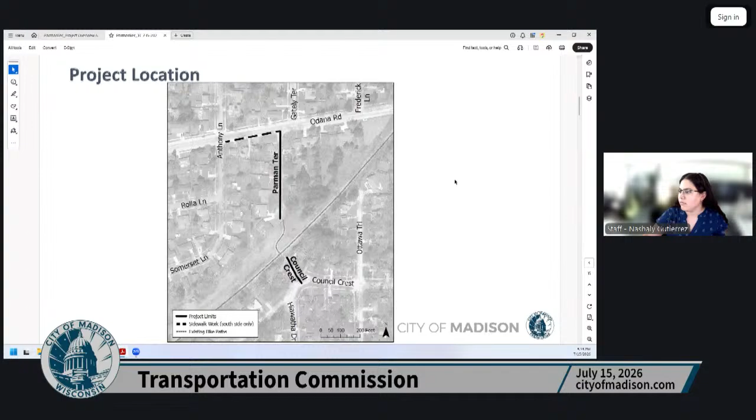For meeting purposes, the project has already done a field visit with forestry and the city design team, and a public involvement meeting last week. I'm here to inform the Commission regarding this upcoming project, the street layout alternatives, and to gain feedback for approval from the Commission on preferred design alternatives.

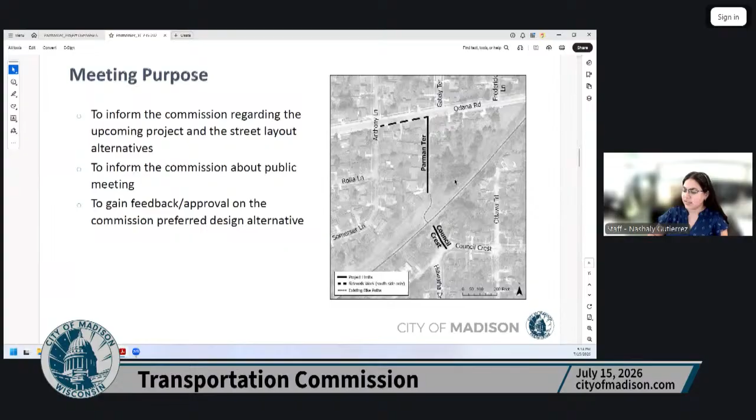Continuing with Complete Green Street, Parman Terrace as it exists right now is classified as a neighborhood street. This is for wider neighborhoods with higher traffic and transit routes, and allows both vehicles to pass each other without stopping. Parman has an existing street width of 28 feet from face of curb to face of curb, with parking on both sides that can typically allow traffic to pass both ways slowly.

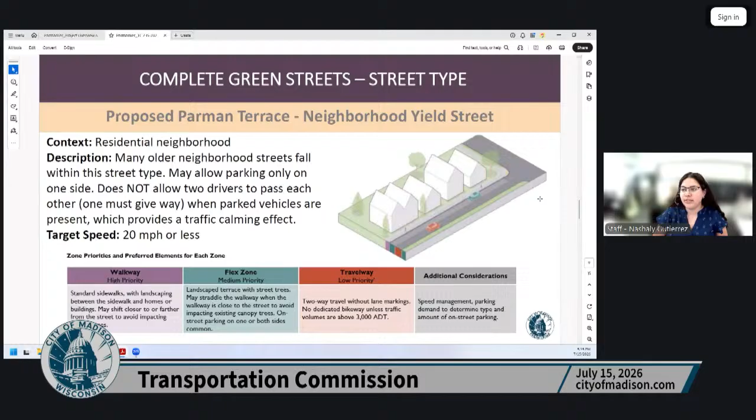With this project, we're proposing to change the street type to a neighborhood yield street. This is for older neighborhoods that fall in this street type, and they allow parking only on one side of the street, and both vehicles cannot pass each other. One must always give way when parked vehicles are present, providing a traffic calming effect.

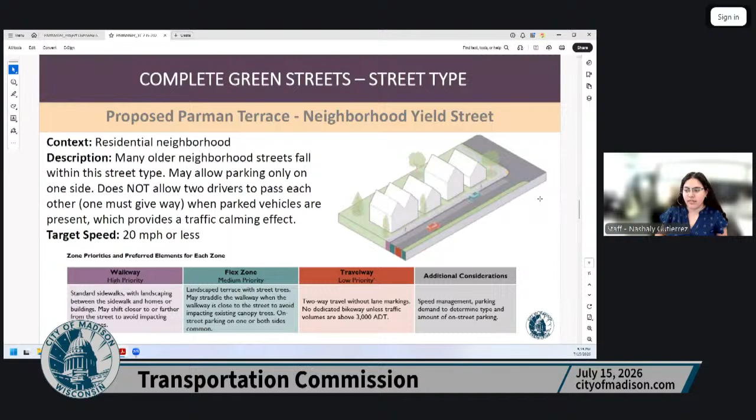As mentioned, we're changing the street type from a neighborhood street to a neighborhood yield street. By the Complete Green Streets table, the requirements are going to be a minimum travel way of 14 feet, to the edge of pavement on both sides. We're maintaining narrow street width if no parking is going to be provided. A typical and maximum travel way width is going to be 16 feet to the edge of pavement, allowing parking on one side. If parking is allowed, two vehicles cannot pass in both directions without one giving way.

With flex zones for a neighborhood yield street, it's from 10 feet to 17 feet. This may include curb and gutter, terrace, trees, sidewalk, and street parking if present. In some constrained cases, a terrace can be as low as 3 feet if necessary.

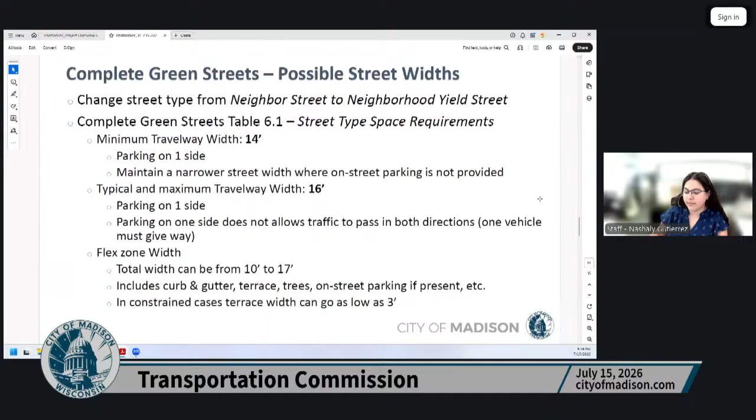With the proposed street design alternatives that were considered, Design A is for a street width of 17 feet from face of curb to face of curb, with a 3-foot terrace and a 5-foot sidewalk on the east side, in front of the trees. We're going to be replacing driveway aprons, maintaining trees in the right-of-way, and having a narrow street for traffic calming. This sidewalk for this design is going to be maintained by residents, and the existing parking on both sides will be removed, giving a travel way of 13 feet for the street. This typical section is going to be seen from the cul-de-sac to Odana Road. The street right now has a right-of-way of 49.5 feet.

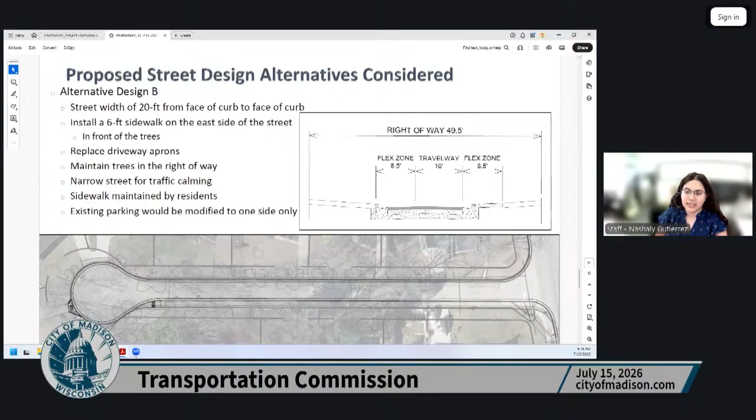Continuing with Design B, this is for a street width of 20 feet from face of curb to face of curb, with a 6-foot sidewalk installed on the east side of the street in front of the trees. We're going to be replacing driveway aprons with this design, maintaining trees in the right-of-way, and giving strict traffic calming with a narrow street. For this design also, the sidewalk is going to be maintained by residents, and the existing parking will be modified to only one side, given a flex zone as shown on the typical section of 8.5 feet - this will be 6 feet for street parking and 2.5 for the curb. A travel way of 10 feet, meaning both vehicles cannot pass each other without one giving way. The other flex zone of 8.5 feet will be for the curb and gutter and the sidewalk that's going to be placed.

Design C is a street width of 20 feet from face of curb to the flow line, having a 5-foot sidewalk at street level on the east side in front of the trees, replacing driveway aprons, and maintaining the trees in the right-of-way.

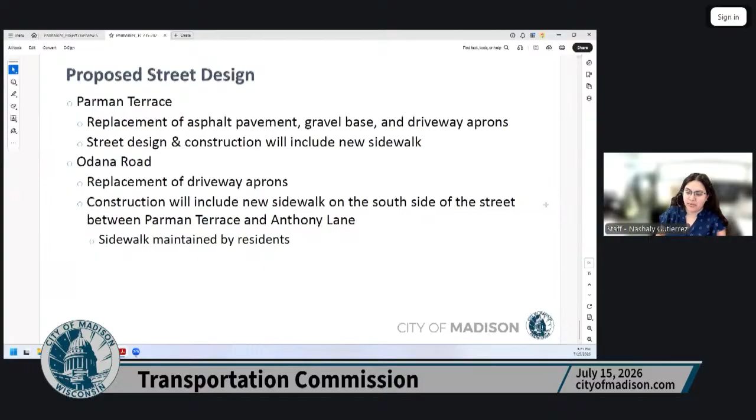For Odana, we're going to be replacing the driveway aprons, and the construction will have a new sidewalk on the south side from Parman Terrace to Anthony Lane. This section of sidewalk is going to be maintained by residents. Something I forgot to mention is that Design C is going to be our city staff recommendation for tonight.

Oh, sorry, I think you're mute. And I am, thank you. Yes, I try and mute just in case.

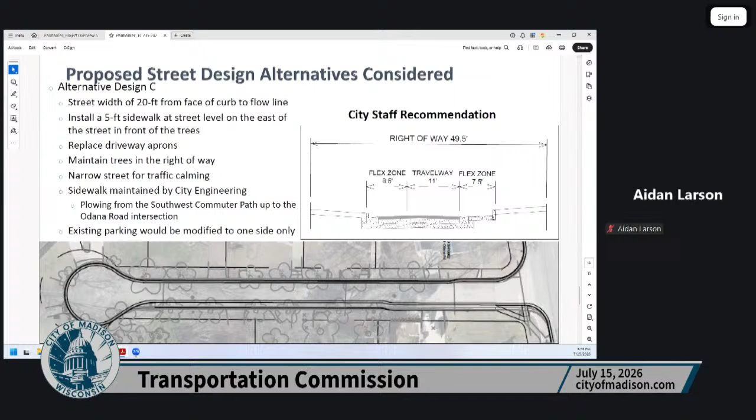As Nicholas said, this street is just wider than anything that we have established as good design practice. All engineering and safety studies from the modern era say we should not be building streets like this.

Option A just seems like objectively the best option. The street is never parked up, and there's plenty of room in people's driveways. I don't understand what we're doing here if we choose option C. It just seems like we're rubber stamping the same old design we've seen for decades that we know kills people. So it's disappointing if we pick C. I'll continue to call in, but people shouldn't have to call in to say this isn't what we want because it's killing people.

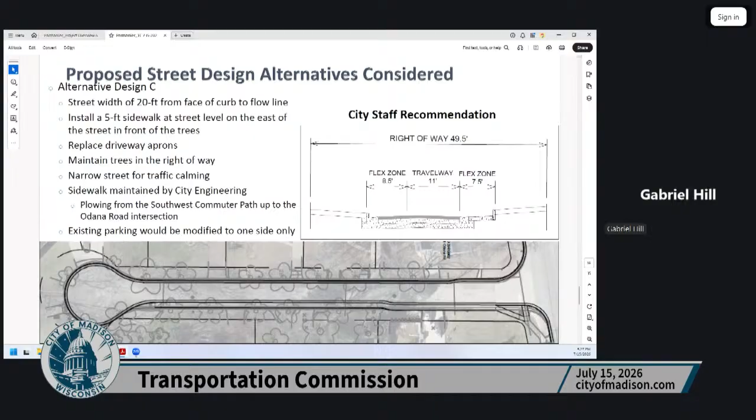Thank you, and I can't take questions. I might have marked that I can, but I can't because I'm at work. Okay, have a good one. Thanks, we appreciate you coming and sharing your thoughts. Thanks so much.

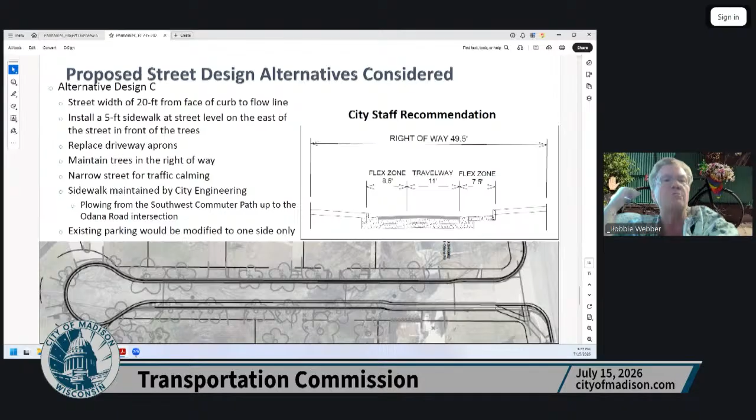Sure, I can give it here. Flow line will be where the water is passing on the curb. If it's a typical curb, it'll be the face of curb. But because this is going to be an alley curb, it's a roll curb, so we don't have a full curb head. It'll be the center of the curb where all the water is pulling.

So is that between the travel way and the sidewalk, or is it between the sidewalk and somebody's yard? The flow line is between the sidewalk and the edge of pavement. So it'll be an alley curb with the concrete sidewalk between that curb and the people's houses on the east side.

So it's the travel way for cars and parking that is 20 feet, is that correct? Correct. Okay, so that was my first question, just to clarify so that I understand. And then you said it's a rolled curb and then a sidewalk? It's an alley.

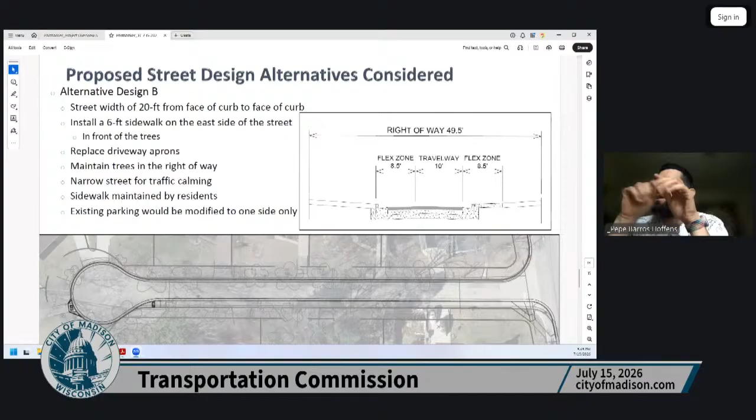Thanks for the presentation, I appreciate the room for discussion and asking questions. I'm wondering—we're closing one sidewalk gap on Odana with this project. Is there any other project in the future, or what's the projection for closing the next gap on Odana?

To the west? Yes. Or the east? To the east—I believe that's what Harold just mentioned. As of right now, we decided not to put that in because it's more complicated. There's tree removals there, and Kevin thought that piece was less critical than the piece to the west. So as of right now, there's no plan, or I'm not aware of a plan for that next piece.

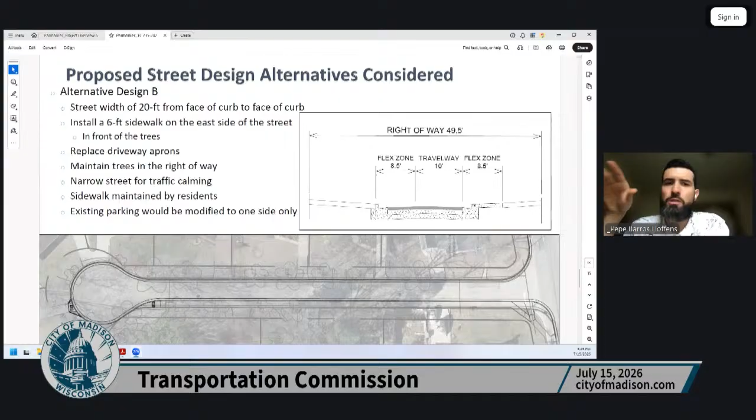Okay, and this might be trivial—I'm asking from ignorance here. What's the logic with the curb going further into Odana on that east side? What does that gap look like, and how does it connect with what's in place right now?

It's matching—actually, it's matching. Is it matching what was just built? We just put a crossing in at Parman and Odana, so we're matching that. Is that accurate, Nashaly? Yes, it will only be the curb ramp connecting to the new Odana sidewalk that has the change, because of the narrow street, but yes, we're matching that connection.

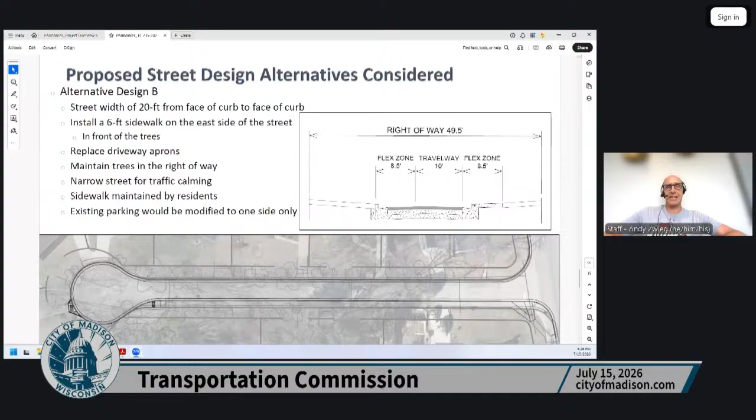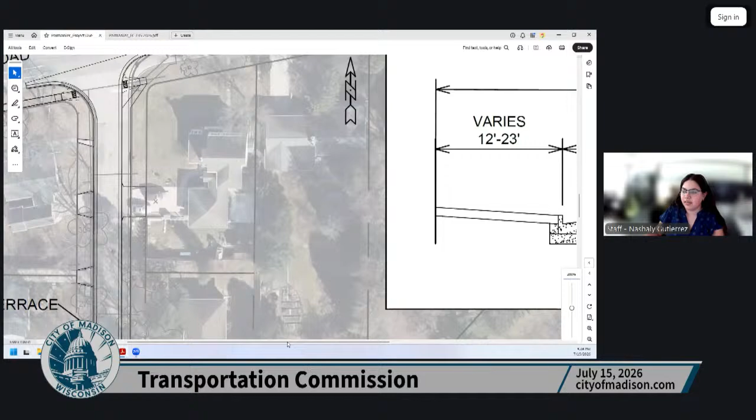So I think the aerial in this photo is off—we've done a project at the intersection since then, and that's what we're matching. Okay, so on that east side, yes, it can be seen a little bit closer on the exhibit. Yeah, because also option A is different than options B and C in how that ends.

So I guess I was looking at option A on my screen and didn't see that connection. Yes, but at the moment the only one will be the ramp connecting to Odana, which might extend a little bit with the curb ramp. I see now—yes, on that photo, on the east side it does come back, kind of like a curb extension into Odana, and then it swerves back.

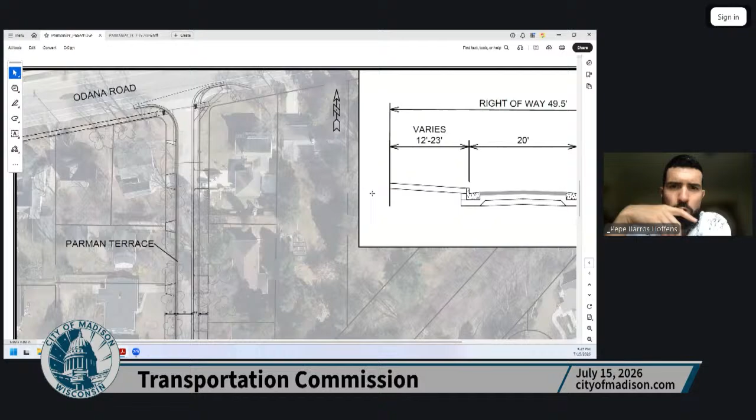Is that going to—it looks like it's blocking the current bike lane. Yeah, look in Google, I'm pretty sure it's in Google right now. Yes, the aerial isn't up to date with the changes done there. Yeah, I was trying to look at it on Google too, to make sense of that—why the curb is so much longer on the east side of the intersection, and if that's going to be built on top of the bike lane. It appears it blocks the—

We didn't have a bump out there, so we utilized the parking—you weren't going to park there anyway because it was close to the intersection—and then stopped the curb short of the bike lane, so it does not appear to impede the bike lane.

I can't get quite a good angle on it in Google, but okay. I think we're using a piece of the gutter from that Odana bump out that was built, as part of the bike lane—it appears to be that. It might be 3 and 2 for 5, that's maybe where we're at.

Okay, so it is going to be a bit of a bump out, but not blocking the bike lane, just taking over what is parking right now, or just curb, probably. Yeah, and that's there anyway—that's there right now. It was already built in 2025.

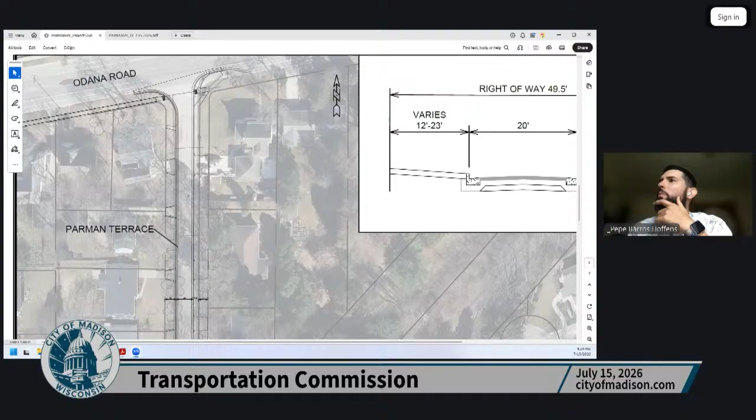Oh yeah, I didn't see it on Google, but maybe I'm just not familiar with that intersection. In Google it shows it, almost finished with construction—like all the barrels are out there. Okay, I'll go back and look there then. I have my Google person kind of in the Parman Terrace part of the intersection, I guess.

Okay. And then, yeah, I guess I have comments. Harold was also saving his comments, but Robbie already shared a little bit.

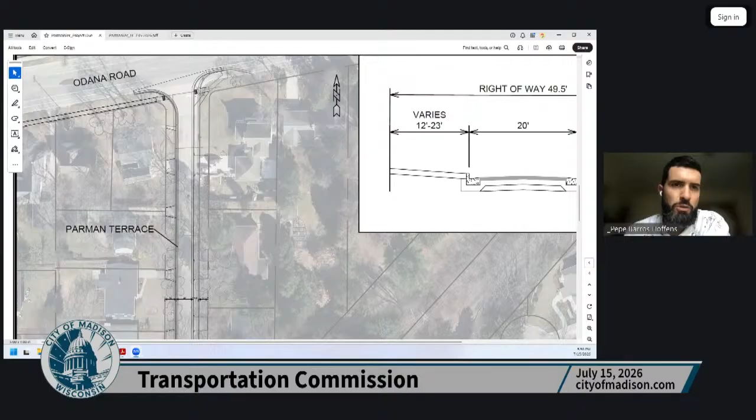I generally just agree with what Robbie said. If we're thinking of putting a sidewalk, why not just putting a standard sidewalk in the regular way we're thinking? A street level sidewalk, you can put all the signs in the world, but it kind of encourages driving over it, parking over it, or having other behaviors there. I'm going to save some of the other comments for later, but let Bill ask questions if he's got some.

Thanks, Pepe. Bill, go ahead. Thank you, Ann.

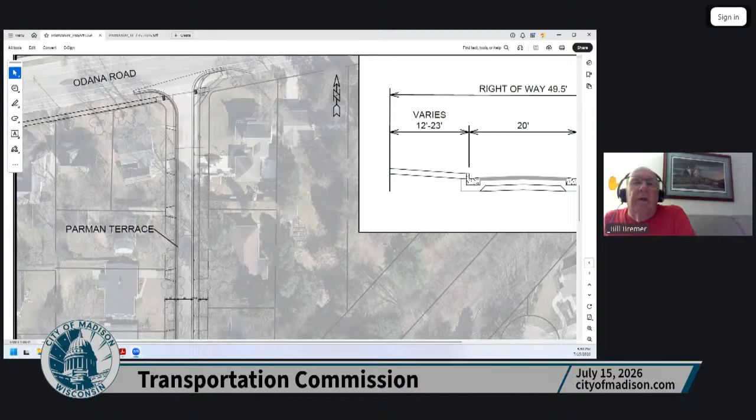What were the neighbors' discussions about when showing the proposed project, and what are they concerned about? Shoveling a sidewalk, or what are their preferences, or what are their thoughts? Was there a concern about losing parking if they didn't have parking?

We didn't go down that route. I mean, it always is a concern, so we were trying to avoid really stirring this project up to be controversial. So by maintaining at least one side and having some kind of pedestrian way on one side, that's what staff kind of threw out as a preference for option A. We in the past have thrown out no parking, and it doesn't go well, so we were just trying to avoid some of that controversy by keeping at least one side parking.

Yeah, all right, those are my questions. I'll wait for the discussion. Thanks. Thanks, Bill. Harold, go ahead.

Yeah, two more questions that occurred to me. First, regarding the snow removal operation - so I think you said the idea is that the equipment that clears the Southwest Path just takes a pass, assuming we go for option C, they would just go up to Odana, turn around and whatever. And then the street would still be plowed by separate plows?

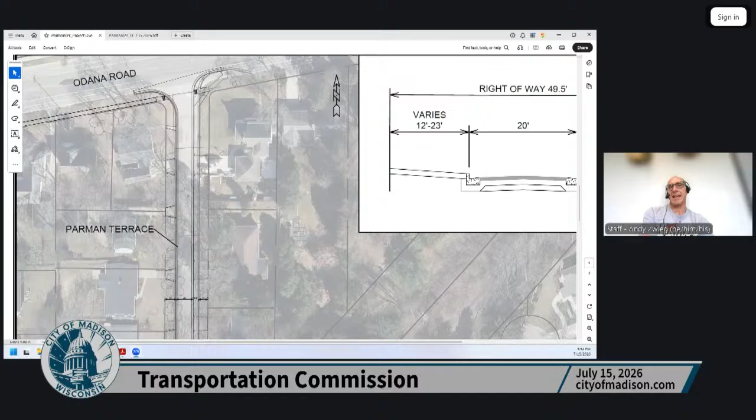And in those situations, it didn't work. So we've been talking about this as staff for a little bit, because it's kind of unique here. But where do we have this, Nashaly?

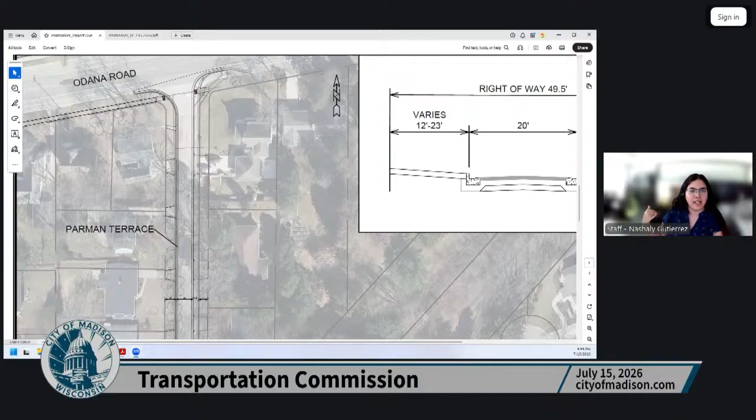A similar can be Cordes Court, close to the Youth Symphony Orchestra building. On the back, that little alley street has the alley curb and a small sidewalk on both sides. For the benefit of the commission, do you mind? Can you maybe pull it up in Street View?

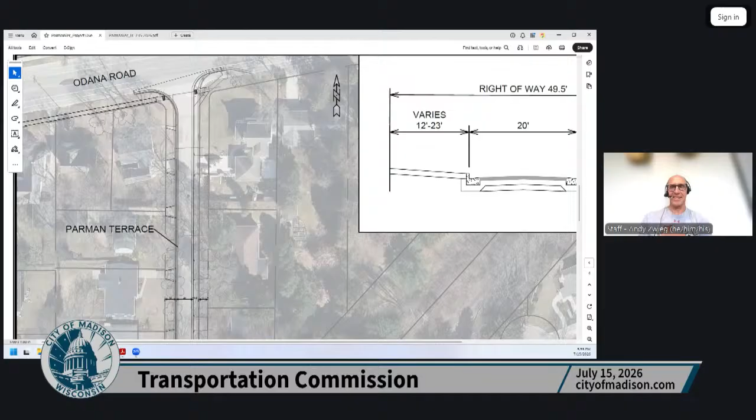Here it can be, this is the Symphony Orchestra building, and you can see the alley curb on both sides and a smaller sidewalk. This looks like it's probably been in place for a long time. This does not look new. I don't think we have any new versions or a new situation like this. And that's unique, and we know that. Just seeing if the commission thinks that this might be something to work on, this specific situation with a path and a cul-de-sac.

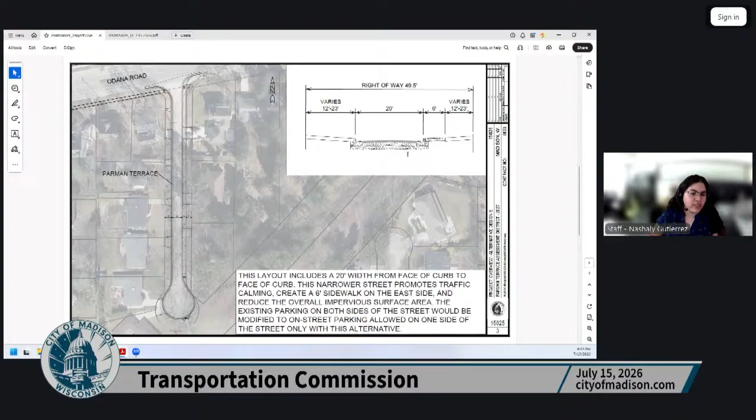Can we go back to see that, Nashaly? Sure, where do I have... here it is. I can say I can have further discussions with the team on placement for street parking with this design.

Okay, yeah, I was just thinking about parking utilization - that part doesn't really matter. I was just thinking if you don't have a terrace as a separator between the travel lane and the sidewalk, it might be nice to get a little buffer through parking, but I'm not sure it really matters. All right, thanks.

Thanks, Harold. One observation I'd make - I live just off Moorland Road, and there's a really strange stretch of Moorland Road where, for some bizarre reason, the terrace narrows down to 3 feet. Because the traffic is really heavy and goes very fast there, it doesn't feel safe. But I would think in this situation that a 3-foot terrace would be a nice separation to have, for snow plowing reasons, and also for the feeling as a pedestrian of having that separation. I just wanted to make that observation.

Robbie, go ahead. I certainly understand that too. This is probably not something that can be answered by the engineering department or even traffic engineering, but I just think that if we go with option C and the city is going to be plowing that sidewalk, and then possibly a street plow comes and dumps more snow on, and then maybe the people from the Southwest Path don't get back in time, or they've got other responsibilities - I think we need to make it clear to the homeowners that regardless of who does the first pass, they are still responsible for making sure the sidewalk is clear, salted, and safe.

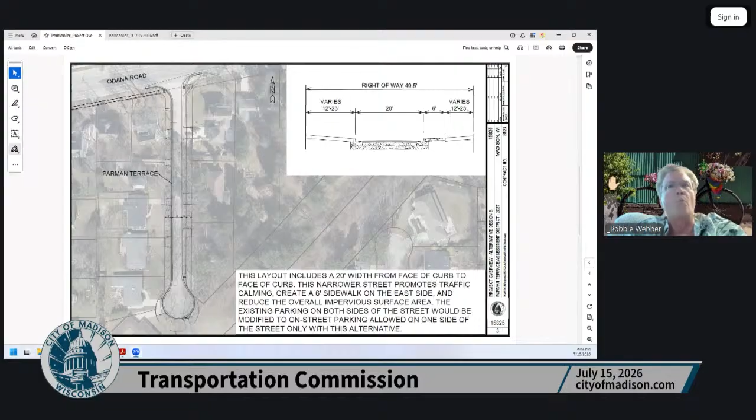And that's a building inspection issue, but I do not in any way want homeowners to suddenly think they are not responsible for making sure there is a safe walking environment in front of their house, regardless of which option we choose. So that's something that, when this project is done, regardless of what is installed, needs to be made clear, so that they're not pointing the finger at somebody else that dumped snow on them and they aren't going to go out and clear it themselves. Thanks.

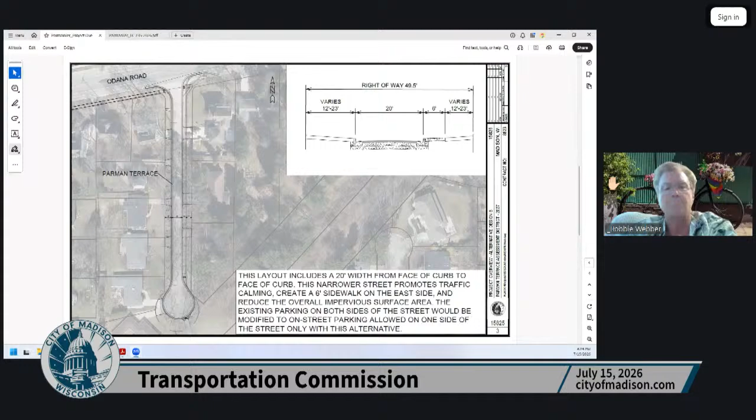Thanks, Robbie. Chris, go ahead. I'm getting the sense that we're into comments now, so I'm just going to assume that. Sure, go ahead.

Yep, I'm in favor of alternative B. I think it's a reasonable solution in this case. We're not talking about limited space where there's lots of trade-offs, and we're not talking about a major thoroughfare with speeding and safety issues. So I think narrowing the street, preserving some parking, and creating a sidewalk makes perfect sense here. It seems sort of like a no-brainer to me.

I appreciate staff putting forward alternative C, and I'm not as vehemently opposed to it as some people seem to be. I think we've got a lot of small, short residential streets where creative design solutions are warranted, including having sidewalks at street level, especially in really narrow, tiny cases. I think the problem here is that if we were to do that, it should probably be a neighborhood shared street type of design, where instead of saying there's a sidewalk here but it's at street level, we're signaling that this is a shared space where people are walking and driving, and designing it that way.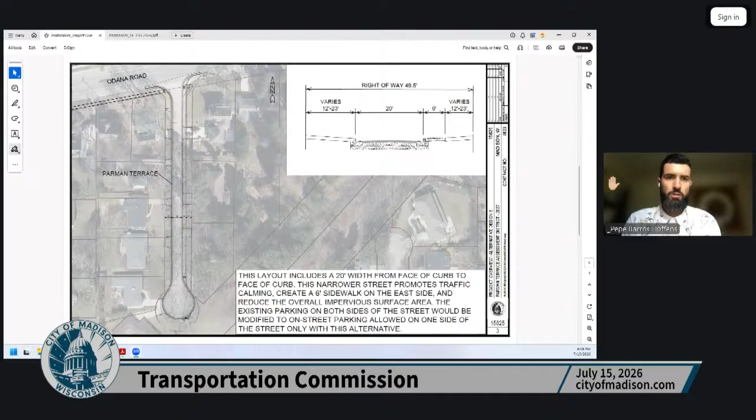Thanks, Pepe. Is that all you had then? Okay, Harald, go ahead. Thank you, Chair.

My thoughts are, I appreciate creative thinking, and just because something is unique doesn't mean it's bad. Sometimes it's good to come up with something that hasn't really been done elsewhere. In this case, it seems to be kind of a solution in search of a problem, so it doesn't really seem to solve anything, and it does possibly come with some trade-offs. So option C, to me, just doesn't really make a whole lot of sense.

Would it be an awful solution? Probably not. I'm not really worried about people parking there or it leading to speeding, because again, it's a cul-de-sac with low volumes, not much parking pressure, so it probably would be just fine. And I think in general, this project is a small project. It's not nearly as consequential as something like Regent, so that's maybe an argument for some experimentation. But yeah, I think option C just doesn't make sense.

In terms of options A and B, I think option A has the advantage of having an actual terrace between the sidewalk and the road, which is helpful for snow clearing and for separating people walking, as Ann Kovich said, from people driving. But again, it's not a high-volume, fast street, so maybe this is not as important.

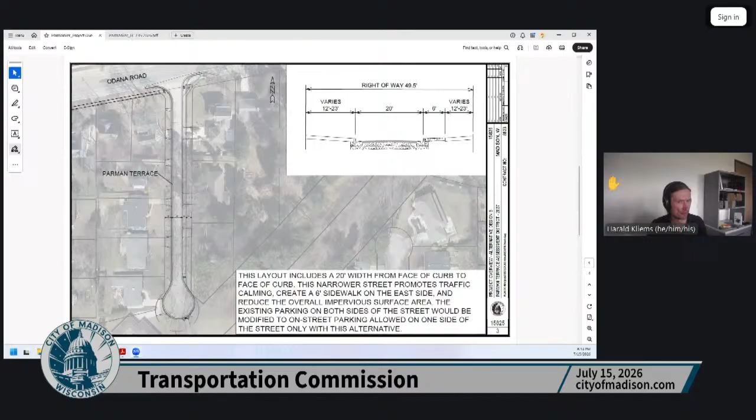Yeah, I mean, my intention was to get review and feedback and have the commission recommend an alternative so we can move forward with board council and design, and get it out for bid to start in the spring.

Yeah, the title of the item is review, feedback, and approval. But your question is a good one. Do you actually need approval from us to change the street type from neighborhood street to neighborhood yield street, as the option? No, that's a good point.

So option A and B actually meet complete green streets. So then I guess we do not, right? Yes. Okay. To clarify, then we would not need an approval. I think the commission seems split, some want A and some want B, so I think it'd be further discussion with traffic engineering on what we think maybe the best option is, A or B.

Yeah, and the commission does have the ability to make a motion on any item that's on the agenda if they choose. But I'll come back to you in a second, Chris. Andy, I don't think you answered the question, or I missed it. Do we need a motion to change the street type from neighborhood street to neighborhood yield street?

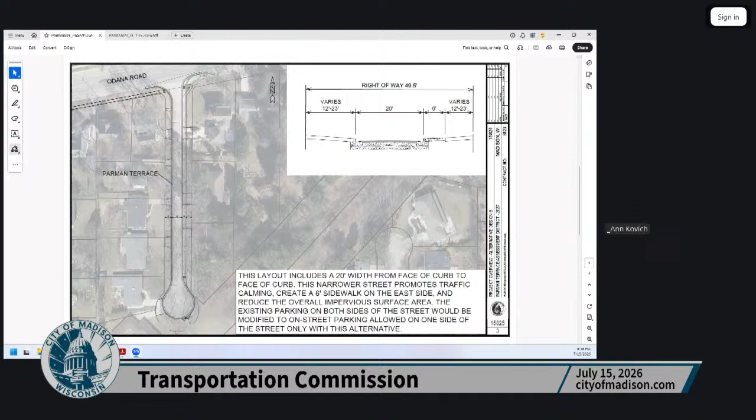I don't think so, because since we're following the guide, we do change street types, and these are just neighborhood streets, so I haven't specifically needed that in the past, as long as we're following the guide. Obviously option C is unique and probably isn't really in the guide, which is why we wanted to point it out. If we were just doing A or B, we probably wouldn't have needed to come to the commission. Or maybe we did, because we're only putting sidewalk on one side, so that is also unique, since we're not doing it on both. Okay, I didn't recall us having to have this discussion about changing the street type. So thanks for that clarification.

Chris? I can make a motion. I'm not convinced we got clarity on that last question, so I'm going to move that we recommend reclassifying the street as a neighborhood yield street, recommend alternative B, and advise staff to consider putting parking on the opposite side than they have. I don't think we're recommending one side or the other, though.

I'm writing, just one second.

Recommend reclassifying the street as a neighborhood yield street, approve option B, and consider moving the parking to the same side of the street as the sidewalk. I'll read it again: recommend reclassifying the street type as a neighborhood yield street, approve option B, and consider moving the parking to the same side of the street as the sidewalk. How's that? Sounds good to me.

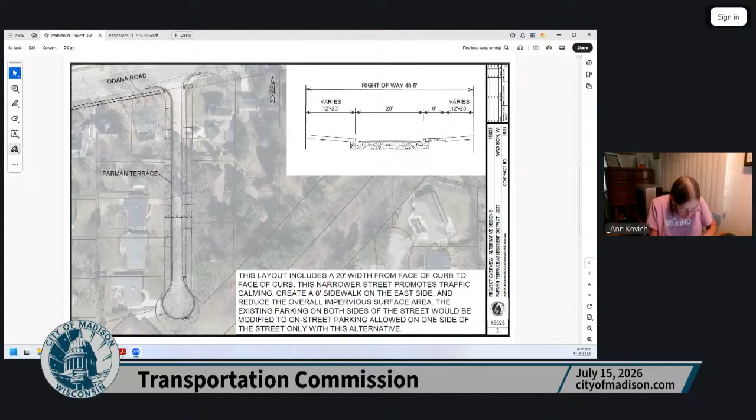All right, so we'll move on to item 4, no right on red, review and discussion. Aiden, do we have anybody registered to speak on item 4? We do, we have a few. Okay, all right, so why don't we get a presentation, Tom, and then we will hear from the public, and then we'll hear from commission members and alders.

Hi everyone, here to talk about no turn on red. So these are the two signs that we use. I'll just go through the presentation here real quickly. I've got an outline about what we're going to talk about today: purpose of the presentation, history, some studies, the federal standards, what other cities are doing, and then we'll get specific to Madison.

So the purpose of this presentation is to provide some background, summarize the research, review our use of no turn on red, and discuss the future use. This came up with the addition of a lot of signs that went in a couple of years ago. We've been wanting to have this as an agenda item for a while, kind of waiting for a lighter agenda. So tonight is the night.

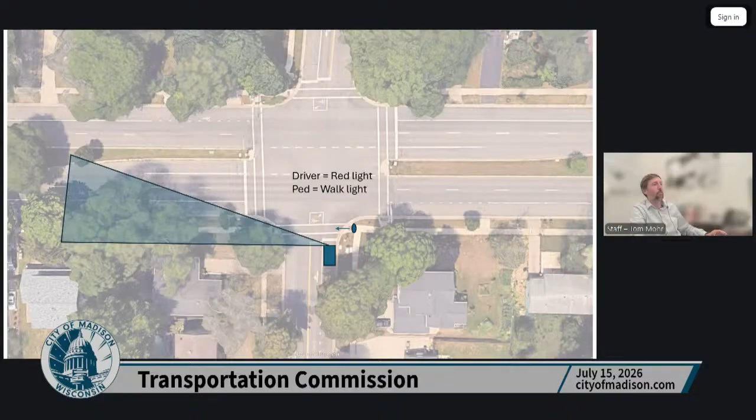But first, I want to go through the importance of no turn on reds. In this scenario, at a signalized intersection—this is Prairie and Raymond, which we talked about in depth a while back, some of you may remember—when a driver is approaching a red light, their focus is to the left, looking for gaps in oncoming traffic. At the same time, a pedestrian in the crosswalk has the walk light. So the conflict is a driver not paying attention to pedestrians directly in front of them or to the right, because they're looking left for gaps in traffic to turn right.

That's different from when the driver has the green light. There's still a pedestrian conflict, but the driver's attention is in the direction of the pedestrian.

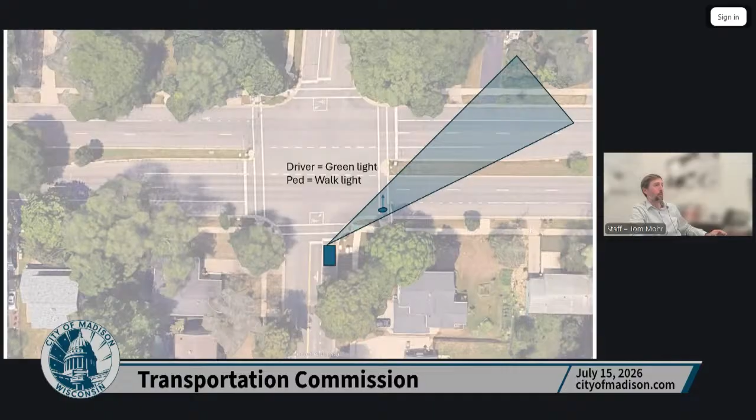So just a little bit of history here, and sorry for all the words on the screen, but I thought this was important to go through. Pre-1960s, right on red was prohibited everywhere. But then in 1973, with the energy crisis, allowing right turns on red was a way to reduce fuel consumption, so it was FHWA guidance to encourage states to allow right turns on red. And then by the 80s, right on red was legal in all 50 states.

There were some studies that we'll get into, but studies showed some increase in pedestrian conflicts, while improving vehicle operations and reducing delay. So today, the policy is standard in the United States, except in a few places like New York City and some urban downtowns where there are blanket bans. The modern debate today has come up more with Vision Zero, pedestrian safety being a focus of cities, balancing traffic efficiency versus safety. Back in the 70s and 80s, vehicles were a lot less fuel efficient, which was more of a concern, especially with the energy crisis. But internationally, a lot of countries never went to allowing right on red—many in Europe.

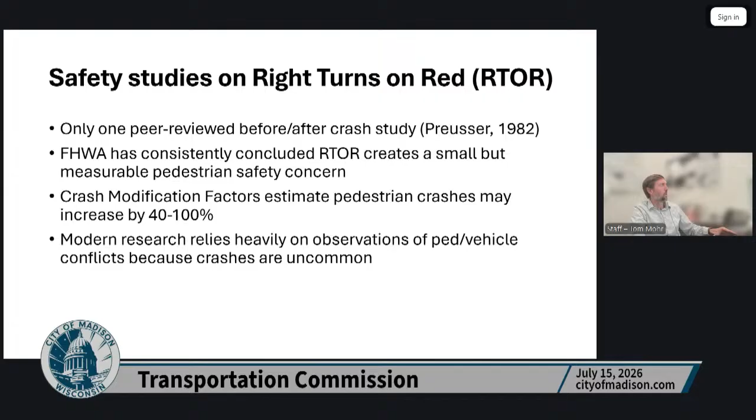I think the best study that's recent that I could find was in Connecticut. The state did an overall study to evaluate using turns on red or allowing right turns on red. They found that the effectiveness varied by location, and the strongest benefit was where pedestrian volumes were high. They did not recommend a blanket ban on right turns on red, so they recommended more targeted use and emphasis on pedestrian safety.

So a lot of stuff that is pretty intuitive. But then the research in the 80s documented the increased pedestrian conflicts. In the 90s, it was focused on high pedestrian areas, and now today, more recent, with Vision Zero, it's focusing less on crashes, more on conflicts.

And so we can think of different tiers of uses of no turn on red. So the top tier would be New York City. That's where it's just not allowed anywhere. I don't think it's signed. It's just a ban throughout the city. And then there are area bans, like downtown districts, campus areas. Ann Arbor has that, Atlanta, Cambridge, and some of San Francisco.

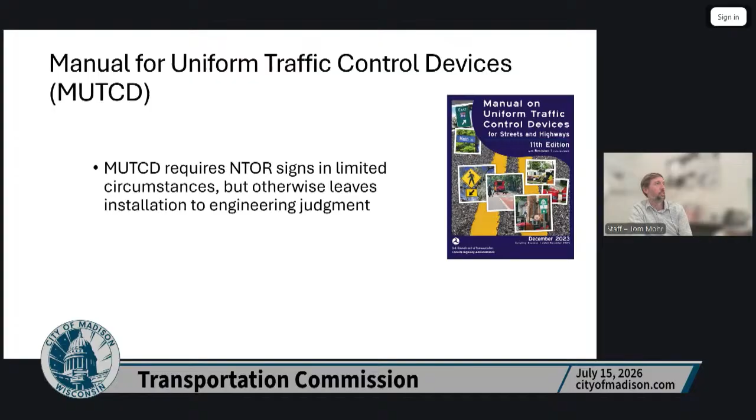So there is federal guidance on this recently with the updated manual for uniform traffic control devices. This is the document that we use for a lot of the signs, restrictions in streets. So the first one is separated bike lanes.

In this case, right turns on red would be restricted from the side street because that movement would be made at the same time that bicyclists would have the right of way. So in the case where the bike facility is separated, and they define that as tubular markers, raised islands, or parked vehicles, then you have to put in the no turn on red. So that doesn't apply to the main street turning across it because they would both have the right of way at the same time. It applies to the side street when they have the red and the bike has the green.

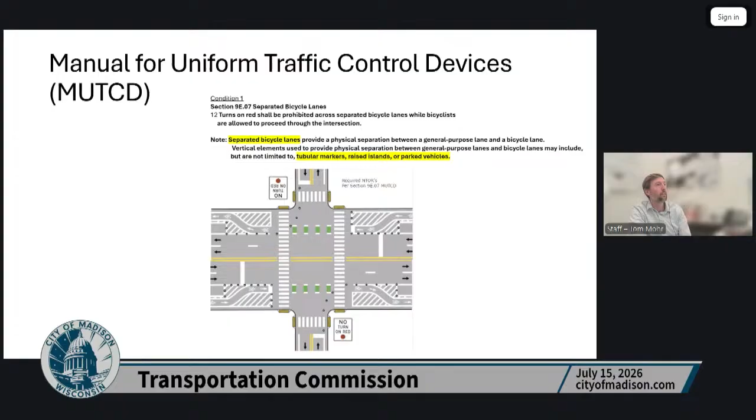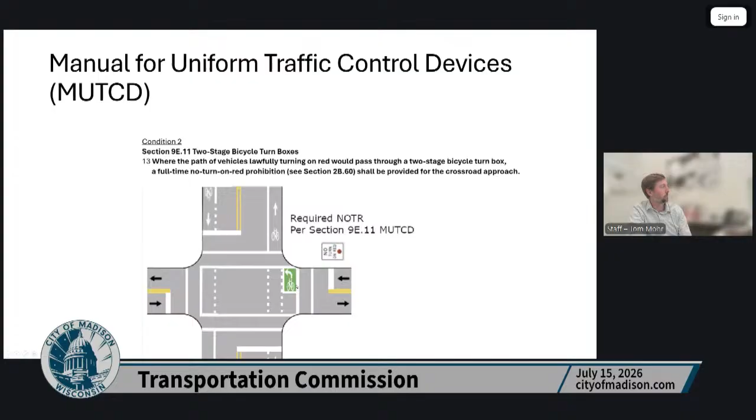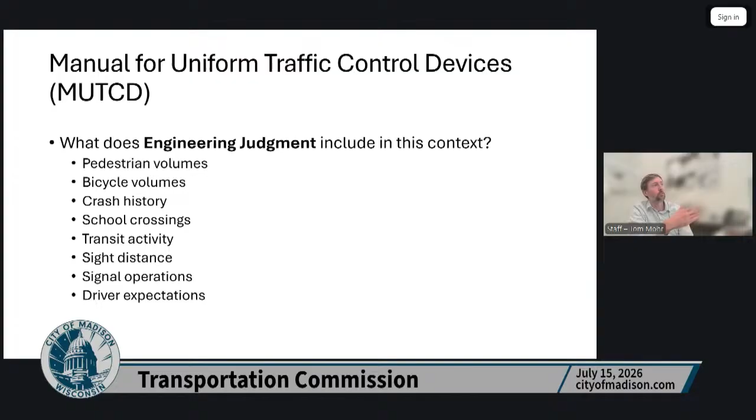The other instance that the MUTCD calls out is where there are two-stage bike boxes. You can kind of make sense that, if in this case, the side street from this side is turning right on a red, there could be a bicyclist in the left turn bike box waiting there. So that would be a conflict. A lot of the MUTCD calls out using engineering judgment. It's a pretty vague term, but when we say engineering judgment, we're using pedestrian volumes, bicycle volumes, all these things to make that judgment call.

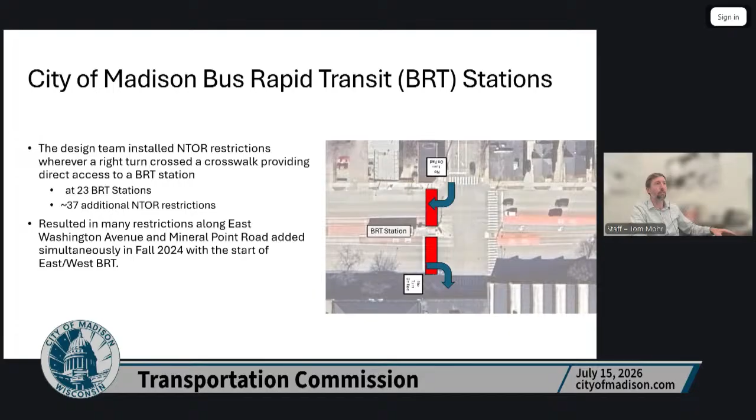At the same time, the side path went in on Mineral Point Road. So for that, additional restrictions were also installed. This is kind of what I was pointing out before with the MUTCD calling out restrictions for right turn on red with a separated bike facility.

In this case, these were installed because with the signal timing phasing, a person on the path would get the leading pedestrian interval. So they would have the right of way to move across or start moving into the crosswalk before drivers on Mineral Point Road get the green. So a right turn on red could conflict with a pedestrian or bike in the crosswalk. These were also installed at the same time, which I think Mineral Point Road was kind of the generator of a lot of questions from the public and complaints about additional restrictions.

So then other reasons, we've got other locations. These are based off of specific requests, complaints that come in over the years. We've got locations for school areas, school walk routes, crossing guard locations, some heavy pedestrian locations or heavy bike locations, and then some with just operational issues.

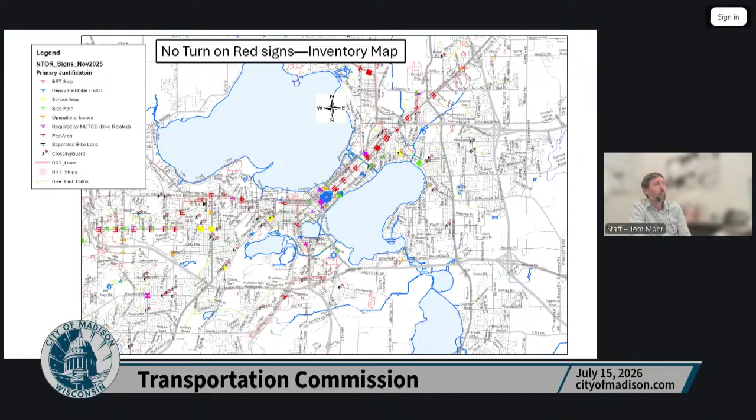So for next steps, we want to continue to evaluate using engineering judgment, like we talked about. We think we can review some of the corridor-wide restrictions that were put in now based off of some observations. One of the things is using time of day restrictions, maybe appropriate to do that in a few places. Some of the locations had signs only put in on the near side of the intersection. We would go through and evaluate whether we think those restrictions should remain. If they should remain, then we would increase or add a sign to the far side.

Sometimes the sign is just not in a great spot for visibility, so we'll review those for better sign placement to increase compliance. That's one of the things we've noticed, that if it's only on the near side, people often drive past it and compliance gets really low. But time of day restrictions, like we have around the outer loop, we'll look into that. And then just continue to balance pedestrian safety and traffic operations when looking at these different locations.

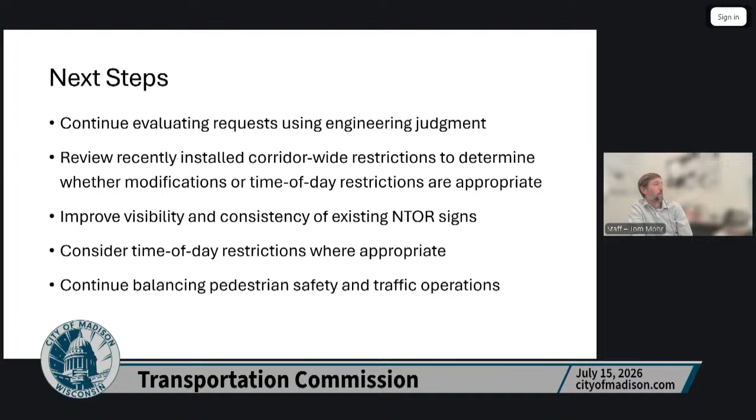So that was all I had. Happy to take questions or discuss and get feedback.

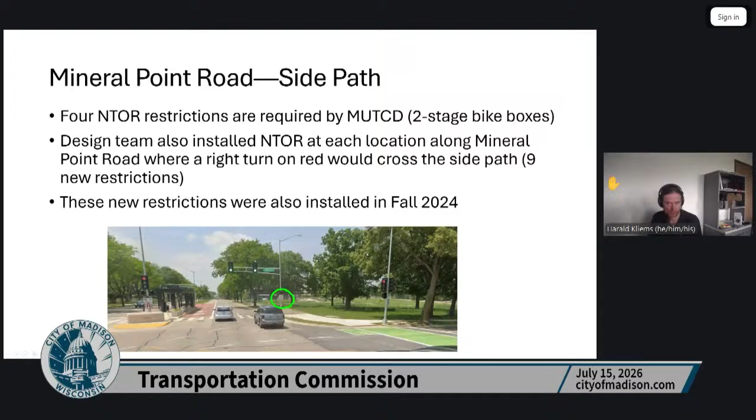Questions I have — one is a logistical question. If we were to use one of those tier 2 approaches, where we take a specific area of town and in that whole area every signalized intersection would be no turn on red, would we have to sign every single intersection? Or is that regulated by state statute and MUTCD? And how do Ann Arbor, Atlanta, and Cambridge do it?

I lived in Montreal, where it's on the island of Montreal, so it's kind of neat — like every bridge, as you enter the island, you have no turn on red for the whole island. We have an isthmus, but no island.

That's a good question, especially for the city attorney's office. I think, especially if we chose a certain area, downtown or campus type of thing, I think we would be looking at a lot of signs at the intersections. But yeah, that's also something we can look into — exactly how that would be done.

And I can get some more information on that. We do kind of have area signs for parking, but then we did end up signing every street for alternate side parking. So I think that might give us a clue that we would probably end up putting in a lot of signs. Yeah, 20 is plenty required a lot of signs too, because that is something you have to sign for it to be legally effective.